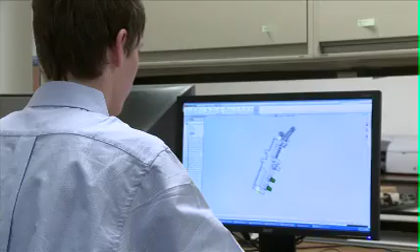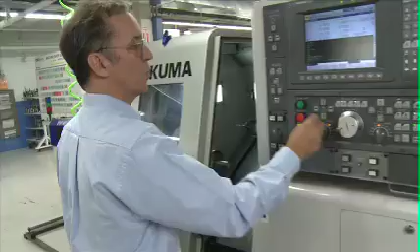The aerospace industry is comprised of many specialized manufacturers that contribute unique and individual parts, components, systems, and subsystems to each single aircraft. Think of it as a team, with the component manufacturers acting as the members. Eventually, the team members collaborate their parts at the plant of the team leader, known as the prime contractor or systems integrator. The team leader will assemble all of the hundreds of different parts into an end product.

Due to the complexities and the cost in the manufacturing of a single aircraft, no single manufacturing company can solely develop and deliver components or equipment on a single aircraft. So they're depending heavily on each other.

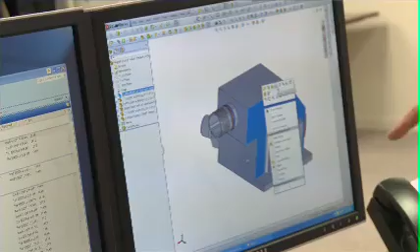At Kenyon, we pay attention to the detail in the manufacturing, integration, and testing of the component and system going into the equipment on the single aircraft. It is these small aerospace manufacturers that make up the backbone of the industry.

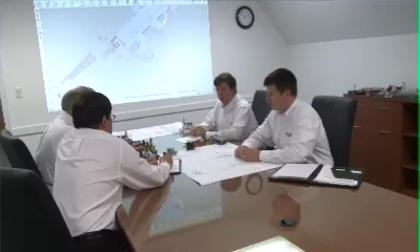Kenyon's a great little family-owned, closely held business located here in Naugatuck, Connecticut. We design and manufacture hydraulic and pneumatic valves used in aerospace and defense applications that go in flight controls, landing gear, and brake systems on corporate jets and military aircraft. We play a role supplying these valves to critical companies that make business jets, fighter aircraft, and transport aircraft.

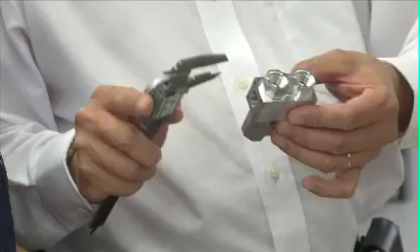Kenyon is committed to constant improvement and excellence in everything they do. In the aerospace industry, there is no margin for error. The company thrives on this, meeting whatever challenges it faces, and is proud to provide critical precision engineered, manufactured, assembled, and tested components for its customers.

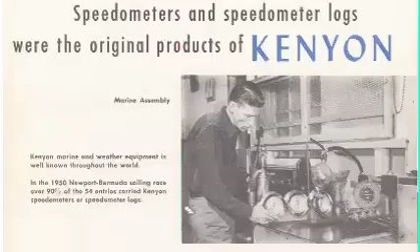Kenyon's history goes back to the early 1950s when Gar Precision Valve, located in Brewster, New York, acquired a portion of the Kenyon Instrument division, which created the name Kenyon. Originally, Kenyon was very active in military markets, supplying parts for all kinds of fighter aircraft.

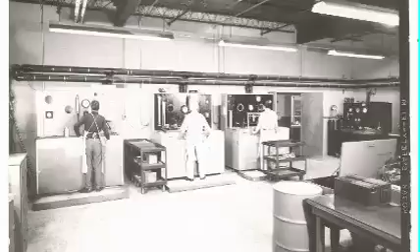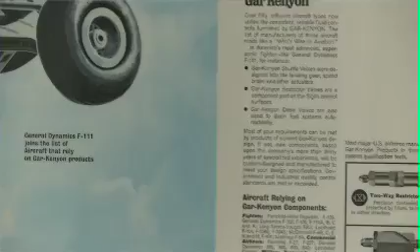During the 1980s, the company expanded into the business jet and general aviation market, developing valves for these various corporate jets and single-engine piston aircraft. Later in the 90s, it moved into the regional jet market and kept expanding, and then in 2003 I acquired the company and relocated it to our facilities here in Naugatuck, Connecticut.

In the early 1950s, when the company was originally formed, lots of the designs were done on paper drawings using very primitive machine tools. Today we use state-of-the-art 3D computer-aided design software and also computer-aided manufacturing software on the latest computer-controlled machine tools. This has allowed us to really get products developed into the market much more quickly than in previous years at lower cost.

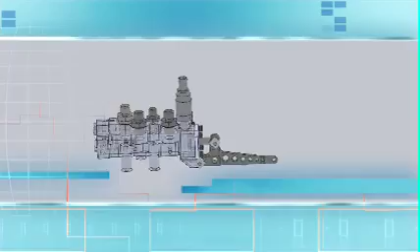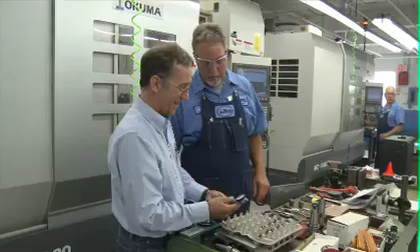Gar-Kenyon's products perform several functions on aircraft. Primarily, they control the flow of fluid to perform specific actions. Some of these functions are activating a braking system, moving a flap or a landing gear, or restricting the flow of fluid. Our products have become standard in the industry primarily because once you have an established product like we have, we've been in existence for 60 years now.

It costs a lot of money to develop an aircraft component.

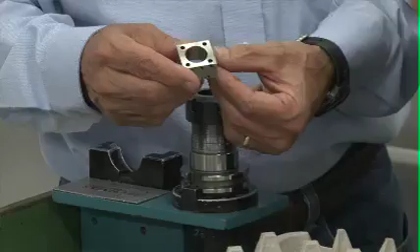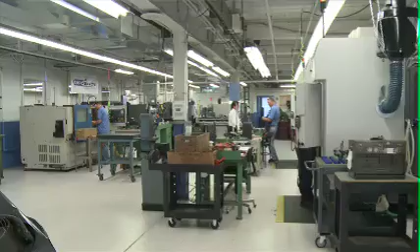As simple as a simple fitting may take $10,000 to $20,000 to get qualified on an aircraft. Some of our more complex valves cost way more than that. And when you get to that level, the cost to replace you is very high. So a lot of airframe manufacturers will tend to keep your product on their aircraft or future aircraft going forward. For example, our products for Gulfstream were designed 50 years ago. They're still being used on the latest Gulfstream 5 aircraft.

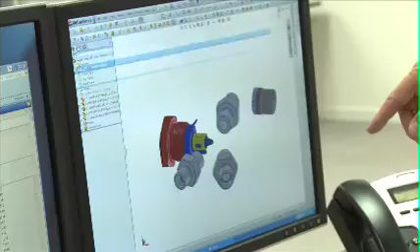Kenyon is a one-stop operation for design, fabrication, assembly, testing, certification, and repair of hydraulic, pneumatic components. They are dedicated to their customers, designing and manufacturing components that far exceed expectations and deliver unsurpassed years of reliability and performance. Kenyon's work ethic is to produce the very best product the first time.

It's to do things right, to exceed our customers' expectations. It's an ethic that has lots of pride. The company is actually about 60 years old. You have folks here who have actually been with the company as much as 52 years. And so there's a lot of pride in the fact that the product we make has physically our name on it. And there's a lot of pride in the fact that what we make and what we do affects people's lives every day. Family members are going to fly those very planes that we make the products for.

In the world of aerospace, the sky is literally the limit. They are seeing a record year for overall bookings and product shipments. Today, it ranks among the world's largest manufacturing industries, supplying jobs to thousands.

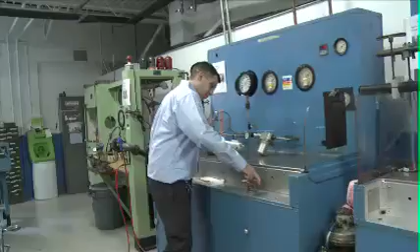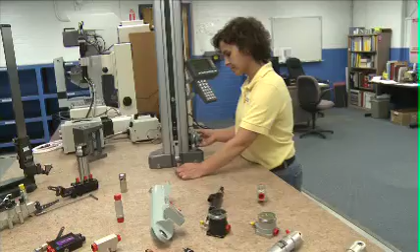By bringing in design capabilities, they can design the next level of assembly and essentially replace one of their customers. The commercial side of the business is growing in leaps and bounds, and the aircraft manufacturers are ramping up to unprecedented annual rates of production for all their airplanes. And this is not just Airbus and Boeing, but the business jet manufacturers in some cases are now coming back out of the recession.

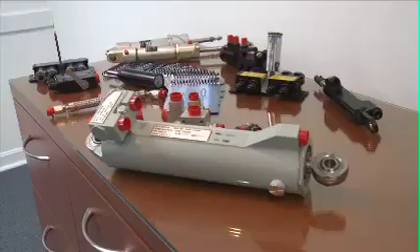There has been job growth over the past 5 or 6 years in aerospace and defense, and it'll probably continue. There have been manufacturing jobs repatriated from low-cost countries. The reason for that is American competitiveness. The workforce, the labor, the management has grown more sophisticated, more knowledgeable, and is much closer to the rank and file worker today than he or she ever has been. So it's kind of the quiet good news of the last several years in the economy.

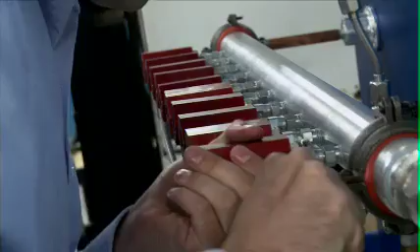Kenyon anticipates continued growth as a company in their future. They believe in the small aerospace manufacturer and see increased opportunities to collaborate with other companies in the field, as well as other industries related to aerospace. The company will continue to be active in the community to promote aerospace locally, as well as globally.

I see Kenyon growing very rapidly over the next 10 years, at least at a 25% compounded growth rate. We're seeing very strong bookings this year, 33% over last year. We've expanded our website. We see the international part of the business expanding at a pretty good clip. Overseas activity is really amazing at this point. We plan on moving into more complex systems and also eventually into electromechanical actuation to leverage our motion control experience.

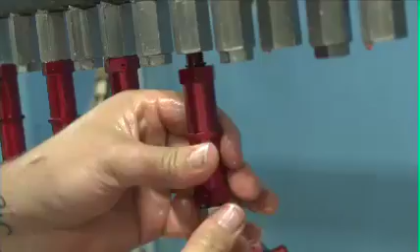Kenyon Aerospace and Defense, as a recognized leader for hydraulic and pneumatic aerospace components, has enhanced their product line by acquiring General Pneumatics Corporation of New Jersey. This move to add GPC's design and manufacturing history is part of Kenyon's long-term plan for continued product line growth and expansion. As Kenyon looks to celebrate their 60th anniversary with a reputation for technical excellence, responsiveness, and innovation, the company continues to be the industry source for hydraulic and pneumatic aerospace components.